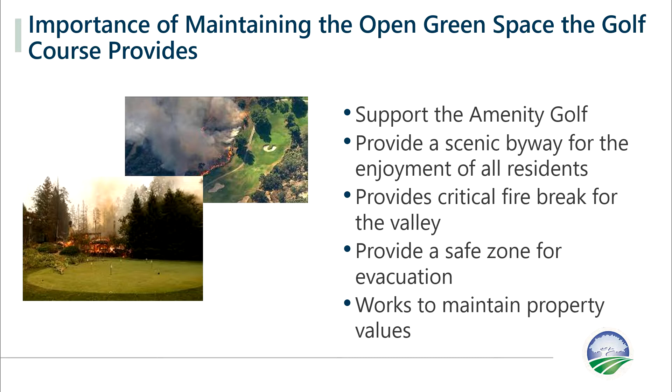So the golf course plays a critical role as a fire break. Plants that are low growing, open structure, and have less resin, such as turf, present a low fire risk. They provide large open areas with low fire fuel, creating defensible space as an effective fire break. It also places more distance between fire and nearby structures.

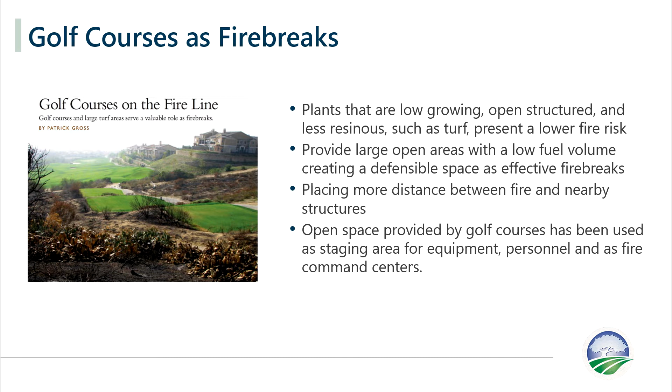Open space provided by the golf courses has been used as a staging area for equipment, personnel, and as fire command centers. A few examples of where golf courses near significant fires provided a break.

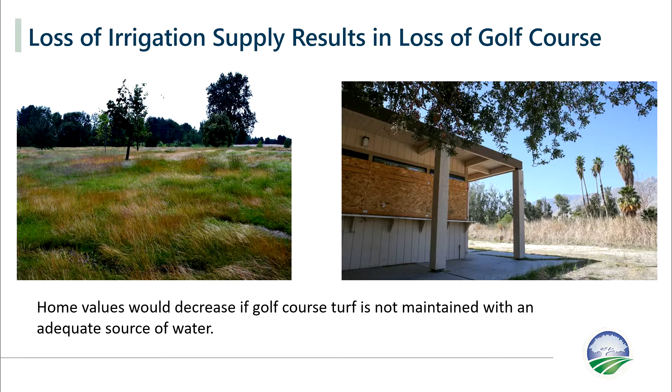Maintaining the golf course requires irrigation supply. You can't have a golf course in that green space without water. Throughout California, many golf courses have closed during the past drought due to lack of access to water, increased potable water prices, or restrictions on access to water. As golf courses go fallow, home prices around those golf courses are impacted. We don't want this vision here in Rossmoor.

Currently the golf courses at Rossmoor are irrigated through three main water sources. The first and main water source comes from Tice Creek. Golden Rain Foundation has riparian rights to Tice Creek, and throughout the year we utilize and divert water from Tice Creek into the pond and then use that for irrigation.

A large source of water flowing into Tice Creek comes from the water-cooled air conditioning units on many of the manors here. Those units create condensate that runs off towards the creek. During a hot summer month, we actually have greater flow in the creek than we do right now due to air conditioning units running.

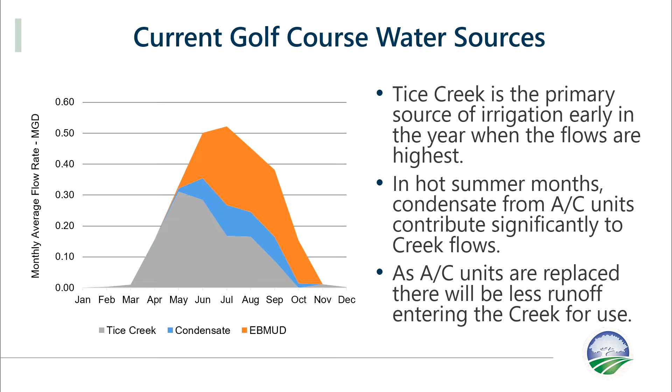Another source of water, when we don't have enough coming from the creek, is potable water from East Bay Mud. We begin purchasing water sometime in May and go throughout the peak months. The later we can go in the season before purchasing water, the better. But that is our other main source.

Tice Creek is a source where we have riparian rights, so we can divert water legally. However, during times of severe drought, the state can mandate curtailment to those water sources. If they determine there's not enough water to meet other demands from the creek, they have the ability to curtail those rights.

Condensate from the water-cooled air conditioning creates a great deal of the volume in Tice Creek. Those units are likely to be replaced over the next 5 to 10 years, so the condensate and runoff we currently recycle may go away. Tice Creek is a valuable source for us right now, but it is somewhat in jeopardy as we move into greater drought seasons.

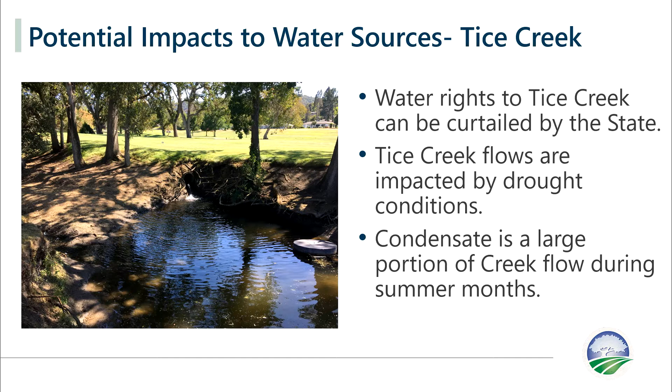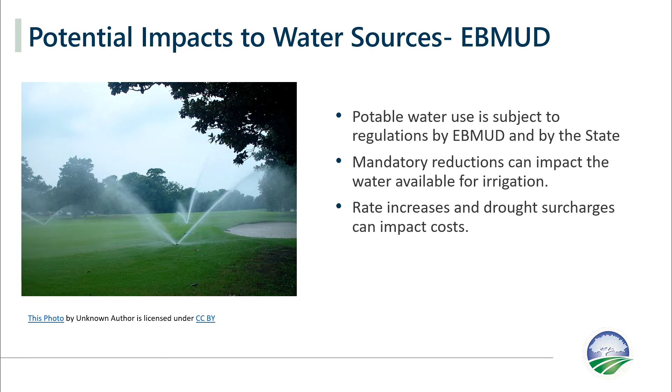Our other source, East Bay Mud water, is potable water and is subject to restrictions from East Bay Mud or mandatory restrictions from the state. We are currently in drought conditions—as of April 5th, our current classification is severe drought in Contra Costa.

Other areas in California are already in extreme drought conditions. Last year, at the beginning of September, Contra Costa was also in extreme drought, and that was just at the beginning of the rain season. The fact that we are already in severe drought conditions at the end of the current rain season is not a good projection for moving forward.

When you are under extreme drought conditions, water is inadequate for agriculture, wildlife, and urban needs. Fields are left fallow, orchards are removed. Fire season is very costly, and the number of fires and the season itself are extended. Many recreational activities, such as golf, are impacted.

Fish rescue and relocation begins. Policy changes begin. Agriculture unemployment is high, and food chain supplies are interrupted. There's poor air quality because of greater greenhouse gas emissions, and water shortages are widespread. Surface water is depleted, federal irrigation water supplies are extremely low, junior water rights are curtailed, and water prices are extremely high.

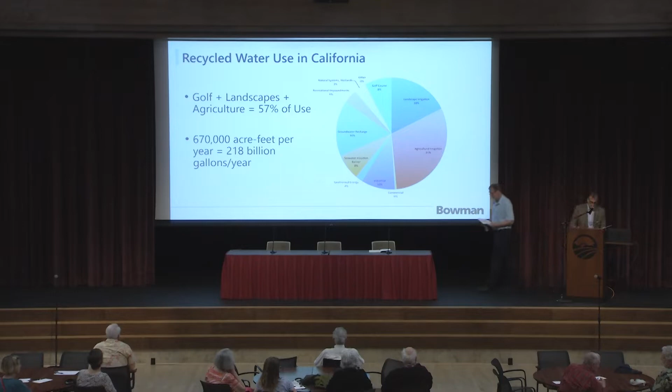Thank you, Jeff, and thanks to all of you for inviting us into your home this afternoon. We're proud to be here and to be part of the project that's being analyzed. I want to tee up, as Jeff did, the recycled water use in California, just so we can get a little bit of perspective about who's using it and how much they're using it.

On an annual basis, there's over 200 billion gallons per year of recycled water currently being used, produced and used throughout the state. Of that 200 billion or so, almost 60% is being used for a combination of golf course, landscape, and agriculture. So we know how to create recycled water acceptable to these end uses.

And we know, and are doing so throughout the state. We're meeting commercial, geothermal, seawater barrier, groundwater recharge, recreational impoundments, wetland development, landscape irrigation, agricultural, and golf course needs. Golf course is still on the low end, maybe about 8% of the total volume dedicated to golf course use.

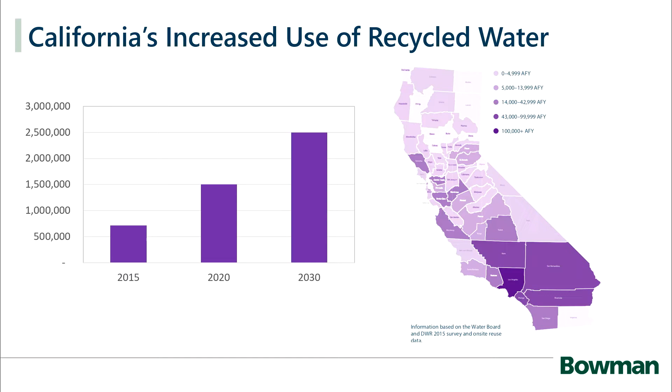As we use recycled water, we get another benefit. The potable water that we're currently using can be suspended and given back to the agencies that distribute potable water, making that supply more sustainable and more readily available, while instead we use recycled water merely on the landscape. So it helps both camps out. What we do with recycled water helps us maintain our potable supply.

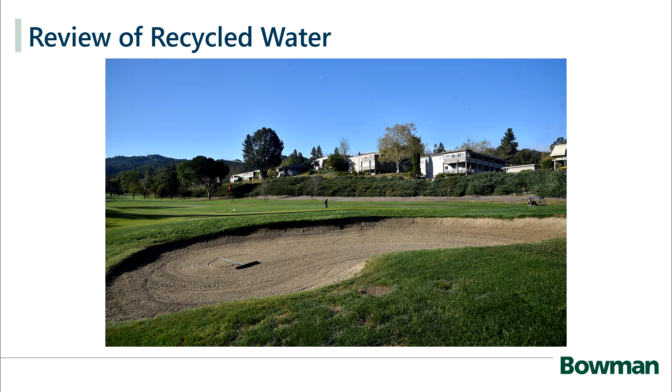I want to just mention briefly a review of recycled water. It's heavily regulated. It's regulated at the state level, at the regional level, and at the federal level as well.

California's Code of Regulations, CCR, regulates the development and use of recycled water through what's known as Title 22. Title 22 mandates that recycled water be used in a safe and effective way for non-potable reuse applications. I should amend this slide because there are committees at the state and regional level focused on indirect and direct potable reuse. That means going beyond the unrestricted use for irrigation purposes, but creating recycled water that can eventually go into the potable water system. It requires a much higher level of treatment than we're talking about here for the proposed project, but it is being done and it is being expanded.

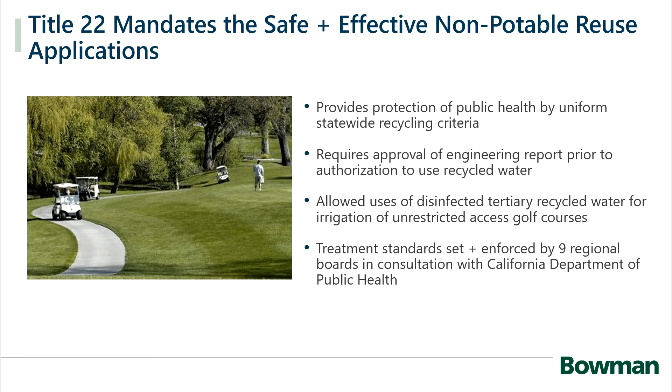Public health is protected by the mandates and requirements embedded in Title 22. An engineering report is required to be prepared, reviewed, approved, and accepted before production can begin. Treatment standards have been set, and they're regulated by 9 regional boards. Here we're within the service area of the San Francisco Bay Regional Water Quality Control Board.

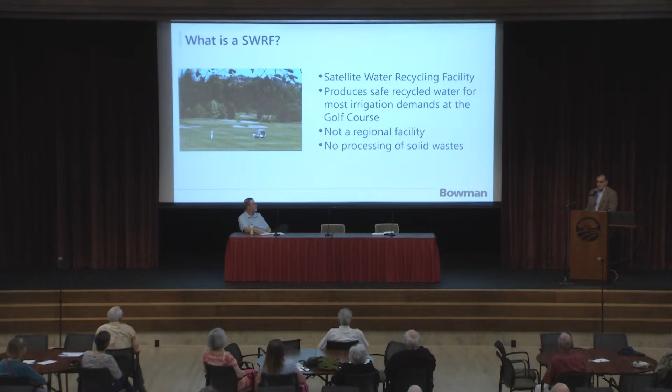Now, we've heard this term quite a bit, SWRF. What is a SWRF? Quite simply, it's an acronym for Satellite Water Recycling Facility. It's used to produce safely recycled water for most of the irrigation demands that the golf course has. It's not a regional facility. We're not looking to take wastewater from outside of the community and bring it in, and we're not looking at producing recycled water and taking it anywhere except within this community.

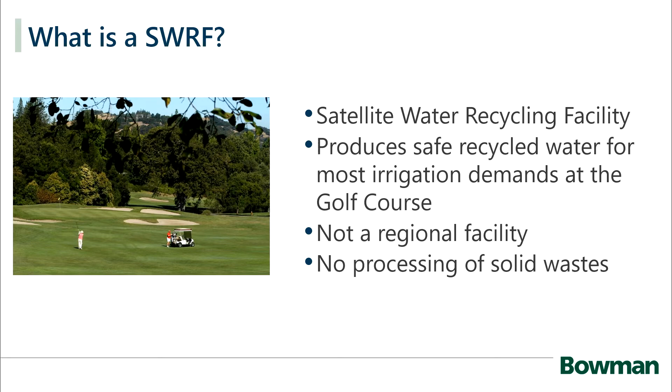Additionally, there is a solid waste component that's produced as the effect of doing recycled water. That solid waste goes back into the collection system as it currently does, to Martinez at the Central Contra Costa Sanitary District's treatment plant. So a SWRF is small. A SWRF produces recycled water in an on-site manner.

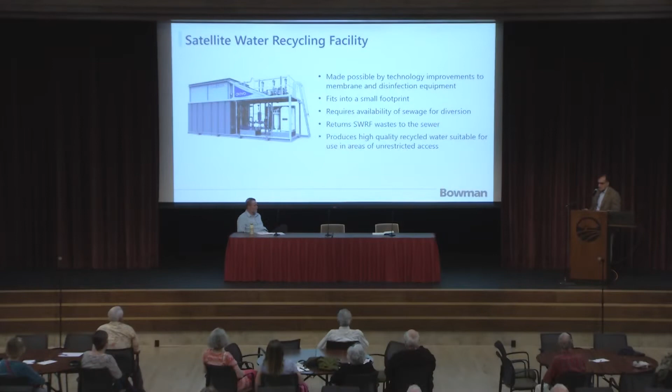Now, this is an example by Ovivo, just one of the many companies that manufactures these facilities commercially and makes them available for these types of projects for purchase. The satellite recycling facility looks at the membranes enclosed in the aeration chamber here as being the heartbeat of the facility. We got to this point where we're able to make such broad and large use of recycled water partly out of new technology.

The technology that has gone into the discovery, use, and optimization of these components, mostly the actual membrane itself, a semi-permeable membrane, has really been the crowning achievement in manufacturing these systems. The manufacturers have been able to shrink the size of the facility down, what's in the black box, because of these increases in technology. So the systems have become optimized, fitting in a smaller footprint, and they're available with the diversion we take in to be able to create recycled water at a quality that's acceptable for a purpose and an end use that's desirable.

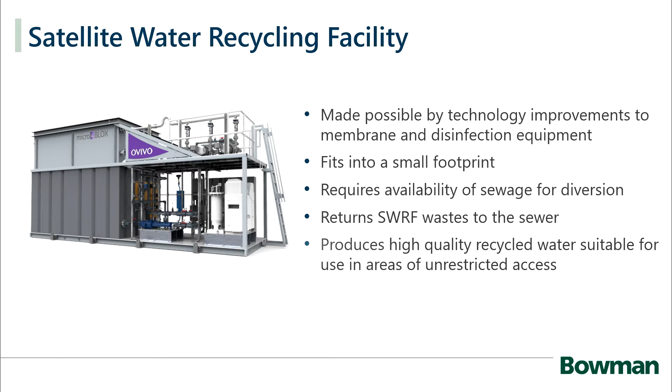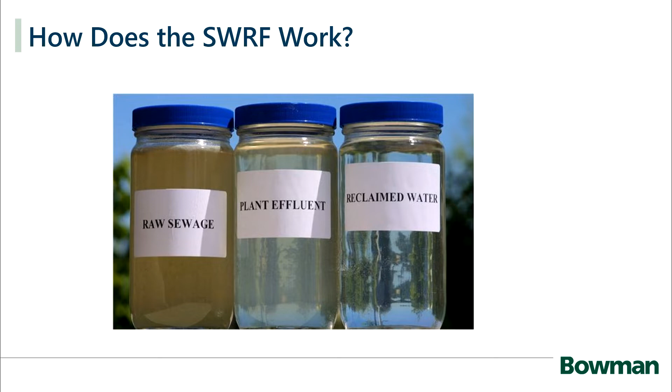Basically, the way these systems work is that we rely upon a series of microbiology inherent in our waste material. We optimize pH, temperature, and oxygen to give these commingled bugs the best environment to live in. Those bugs are managed to consume the phosphorus and nitrogen in the biomass included within this system of treatment. The bugs are then filtered, removed, disinfected, and are no longer a threat to us.

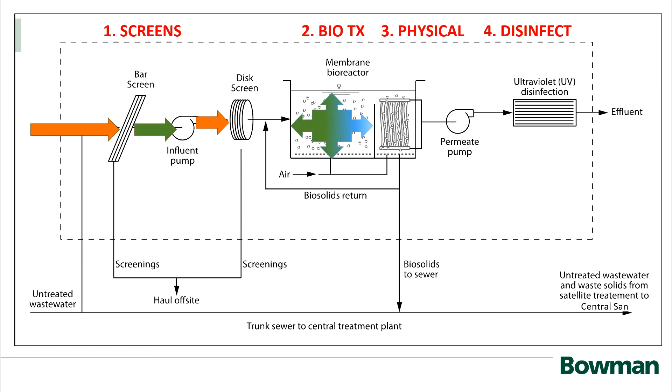This slide shows the treatment process, which begins on the far left, where influent from the diversion system comes in and goes through a bar screen to remove materials that would otherwise negatively impact equipment downstream. After the initial bar screening, we go to a narrower, smaller pore screening, shown here as a disc screen. Then we go into the aeration chamber, which typically has membranes submerged within the chamber itself.

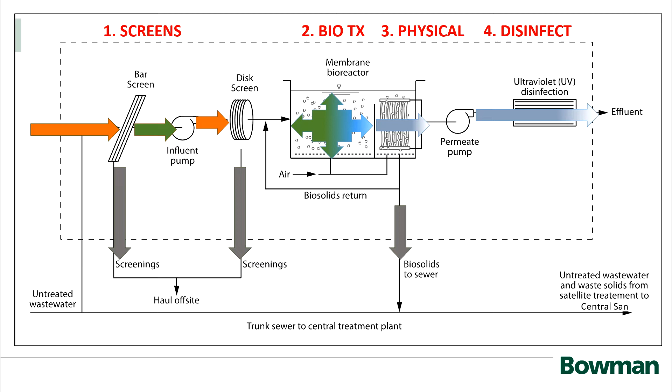Rossmoor has devised its own solution for sustainability from a water resources perspective. The project provides alternative water supply for irrigation. It's not subject to the curtailment provisions that East Bay MUD has, because we're talking about the use of our own water supply. Fire suppression results from monitoring and irrigation of our landscapes, and the site of the treatment plant, the SWRF, is proximal—close to the points of demand. We want to make those runs as short as possible, because it takes pipeline to connect the system up.

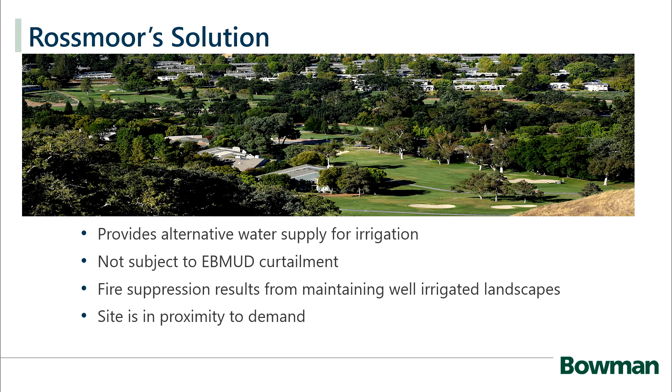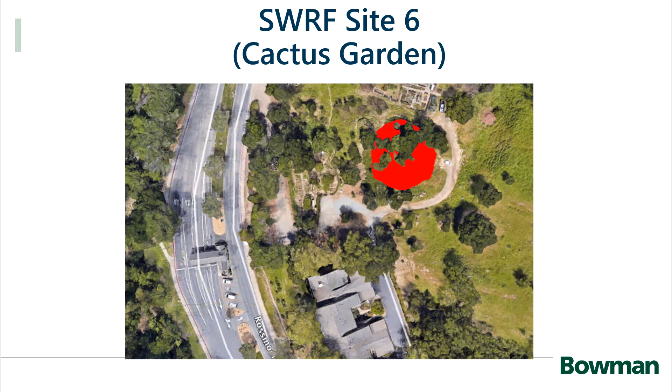So, studies have already been completed along this line of thought. Water quality sampling has been done, along with analysis to ensure we're dealing with water that can produce a product of quality suitable for irrigation of the golf course. Additional flow monitoring has been done, coordinated with Central San. Field environmental studies have been done for cultural resources, mapping of the sites has been completed, and geotechnical investigations are almost finished.

So what needs to be done before we proceed to any kind of construction? It's a bit of a long road and will take a while, but it intentionally provides several breakpoints at which the community could evaluate and reconsider the project. Updating the cost estimate is the first thing—this should be an ongoing activity because of its importance to the overall acceptability of the project. CEQA, the California Environmental Quality Act, mandates a certain amount of investigation of impacts to different resources.

The studies that will be completed include refinement of the conceptual design, which formulates the project description—we think that'll take about two to three months. Finalizing and circulating that document will take about six months. That's a deliberate process ensuring there's been adequate review by the lead agency and other agencies with responsibility over portions of the project, but most importantly, by this community.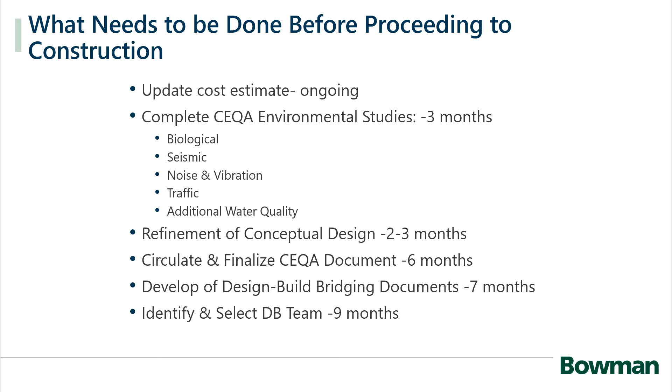There's a set of what are known as bridging documents that need to be developed. The intention is to use the design-build methodology—hiring under one contract both the designer and the construction contractor—in a way that reduces risk and reduces finger-pointing between those two entities. That's about a seven-month process. Then finally, the design-build team is identified and selected through a competitive process, which takes about nine months.

Now, the thing I didn't mention in these slides, but something we should keep in mind, is water conservation. Whatever we can do to conserve water—our use of water within the community—is vitally important. It helps us because we can lower the volume, and therefore the cost, of the facility we're talking about. And Jeff is going to speak to us now, starting off with a bit more on water conservation efforts.

As you can imagine, this is a project that involves a great deal of coordination and approval process with outside agencies, including the City of Walnut Creek, Central Sanitary District, and East Bay Municipal Water District. We are working with those agencies to develop a memorandum of understanding to make sure that we all work towards the same end goal of conserving water and producing a new resource for us.

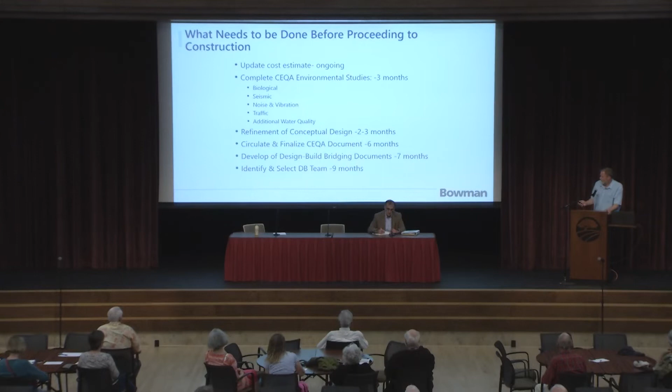So the development of a SWRF is certainly, as Jim just mentioned, a long-term goal, as there are many steps involved, and we've already been doing a lot, and there continues to be a lot to do. In the meantime, we certainly are looking for as many ways to conserve water as possible on the golf course.

This map, and there's also another one of these in the back, shows some of the area that's in yellow that has been taken out of irrigated green space and converted to either wood chips or other non-irrigated sources. I believe it's about 20 acres thus far. There is ability and plans over the next 5 years to try and identify an additional 5 to 10 acres that can be eliminated. That saves a significant amount of water.

We have also worked over the past many years to make sure and secure our water rights through the state of California and the riparian rights so we can safely divert water for the irrigation purposes. We capture as much water as we can already through all of the runoff that is experienced from both the water-cooled air conditionings, but any other source, and try and divert those so we can use those for irrigation.

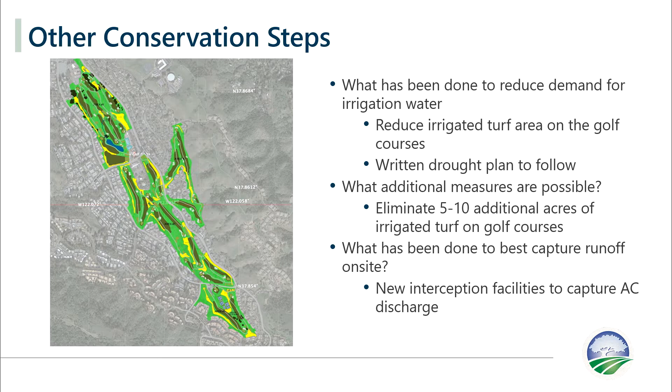We use a highly technical - not sure the right term for it, Blake - but our irrigation system is such that it does not waste water. We are below the evapotranspiration on our use of water, so we try and put down as little as possible. And we will continue to look for ways to conserve water. All of this helps us as we develop the SWRF to be able to build a SWRF that is as small as possible and relies on as little wastewater as possible.

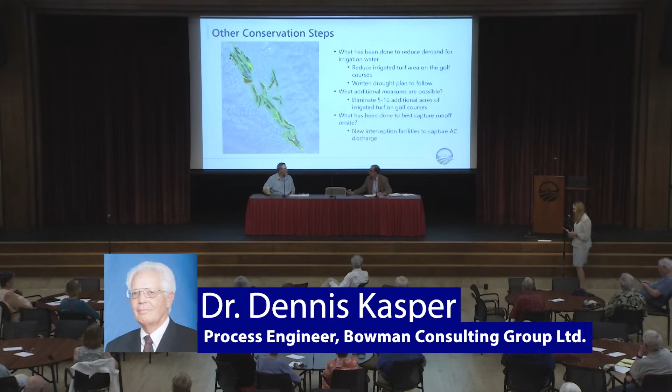Let me also add one thing. The photograph you showed of the Ovivo plant—if that were right next door, you would not see it. It's going to be either with vegetation or with visual blockers to make something that you simply won't see from off the site, basically.

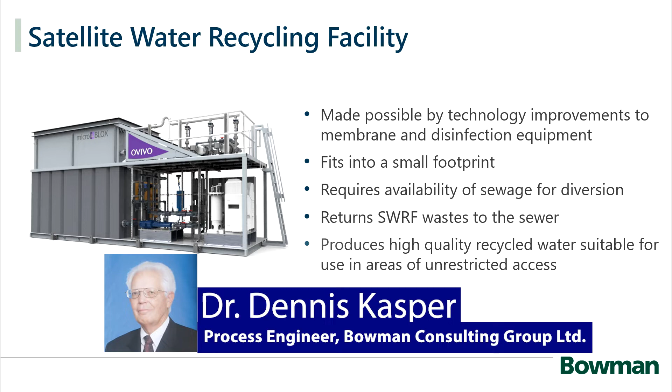Please provide dollar amounts and who pays. So right now we have funding approved to continue with the studies. The very preliminary estimate is in the $11 to $12 million range for the facility itself, and then there's an annual operating cost, which right now, again very preliminary, is in the $350,000 range.

If you compare that to our annual water budget for the golf course, it's very comparable. And we certainly expect that East Bay Mud rates will continue to escalate over time. So it is an expensive project.

It is an insurance policy. If you consider the alternative—if we don't have access to water and you lose the golf course, or you need to rebuild it—we have an estimate just for the cost to rebuild the golf course if it goes fallow for a year plus, in the $3 to $4 million range for efforts to reseed and replant and so forth. So it is expensive, but the alternatives are also potentially costly. We will continue, as Jim mentioned, to refine those cost estimates as we move forward.

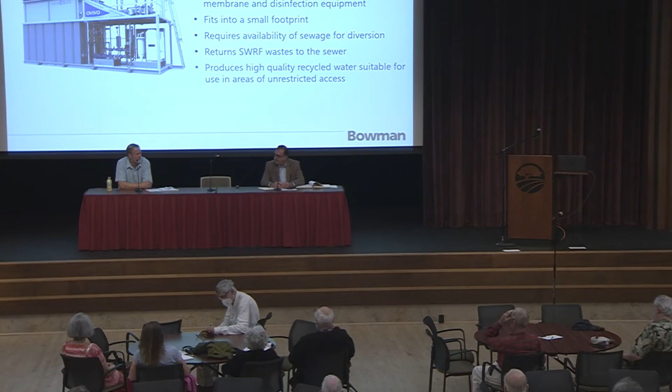With your golf course designer, you can begin to lay out a pathway that leverages this project, maintains maximum conservation, and maybe brings in a new design element or multiple elements. Where we start is the compatibility of the produced recycled water, its quality, with the susceptibility and acceptability of the plant. Depending on your choices for turf and ornamental landscaping, and how everybody's grown up being used to it playing in a certain way, those issues need to be talked through as well.

Maybe it's time that you want to engage a master designer and come up with a different style. Again, our piece of it would be to make sure the water quality is acceptable for those plants you want to bring in. This wouldn't prohibit—it would perhaps open more doors.

How much are we paying for the watering now? Our current budget is about $350,000, I believe, for the irrigation. Is that correct, Blake? 320. And certainly that's an estimate we go into the season with, but the actual amount purchased from East Bay Mud is a variable depending on how much water is available in the creek.

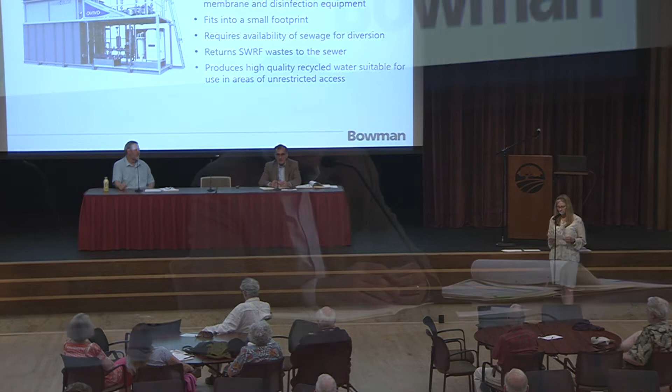Some people do characterize this, and I think rightly so, that a project of this nature is an insurance policy. We know that East Bay MUD's cost of water is only going in one direction—they're really not planning on lowering it.

They've got more to do when their revenues are down, like in periods of drought. They're trying to do as much as they can for sustainability. Projects like this, and conservation, are the only types of projects that actually create new water. East Bay MUD recognizes that, and if you look at their board materials and packets, they've debated and adopted that as a philosophy. They're willing to work with partners like us to get projects like this approved and through their system because of the benefits they provide to everyone.

Do we have wells servicing the golf course? If not, why not? There is one very small well. Many years ago, like 5 to 10 years ago, there was an effort to find a location that would be beneficial to adding a deep water well. Throughout those studies, no location was identified that would produce a quantity of significance. The small well that was added actually produces very, very limited amounts. It's not even operational, the limited amount it produces. There just isn't that kind of source available.

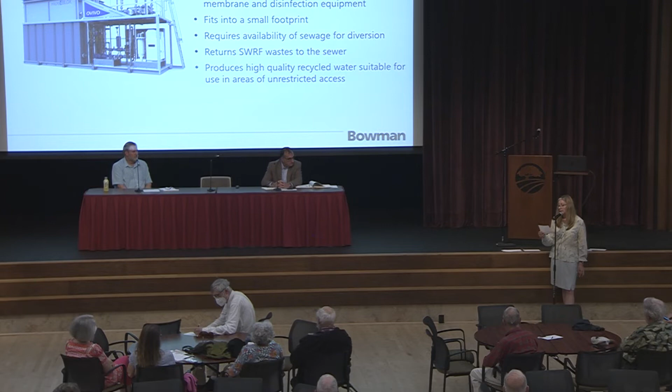Has GRF investigated using reclaimed water from East Bay MUD through a piping system similar to the golf courses in San Ramon? And what would the cost be compared to building the plant? The San Ramon DERWA project has done a phenomenal job creating a recycled water resource. They've used all of the recycled water that's available. There were a couple of other commitments they had made to golf courses to get recycled water, and there just wasn't enough. So they've done a great job, not only creating the recycled water, but getting it to the point of use or reuse.

What would that cost be compared to building a plant? The cost of bringing in new major pipelines from a distance to this location could be astronomical. The proposed project is looking at a small treatment plant, 250,000 gallons per day, with points of diversion and delivery fairly close to one another. We have not done an East Bay MUD solution for comparison, but it strikes me that the kind of infrastructure required, the distance of the pipelines, and the existing commitments and uses of recycled water—so how much is left—I think it's a good investigation if you wanted to find out with certainty. I don't have any more than that.

Were the residents as stakeholders considered? Well, that's one of the reasons we're here today. Certainly we are very preliminary in this whole process. We are continuing to look at the various sites, but throughout the process, and here today, we're here to listen to you, hear your concerns, and respond to those. Throughout the studies, we'll have opportunities for that very same thing. As this becomes decision points for the board, there are opportunities for input. So as we drill down further and further into this project, there will certainly be more and more opportunity for specific input from interest groups, whether it's neighborhoods, golfers, or other constituents.

How many employees or technicians would be needed to hire full-time, and what would be the salary costs per year? I think we just kind of did that one. Cost is getting a little preliminary for, we may contract this. There's a variety of ways we can go about providing staff for this, so that's a little premature right now.

What would be done with the treated water from the SWRF when the water is not needed for the golf course? Does it need to run 24/7 all year round? Two things would happen: the diversion pump station would turn down because we don't need to pump diverted raw wastewater if there's a lower demand for the irrigation water at that time. A strategy would be developed to automate that process as much as possible. We have the ability to turn down the diversion, and we let the wastewater flow by the point of diversion. So if we've overproduced recycled water and don't have a use for it immediately, it would just go back to the sewer.

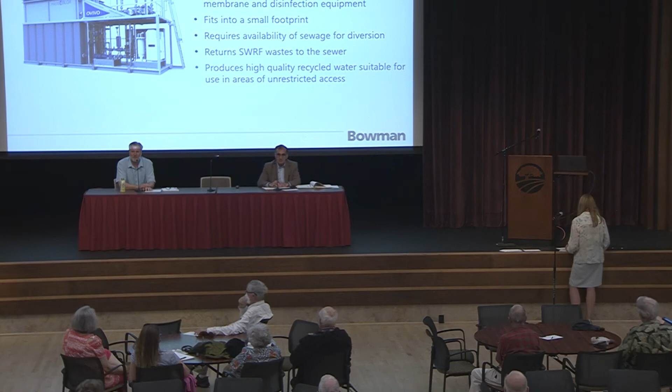Smoke from fires north of Rossmoor can be trapped in our valley for days. What will the smell of the water facility be like on a daily basis?

Raw wastewater facilities are often described in the industry as having a musky or earthy-like smell to them. If smells are noticeable at high concentrations and are off-putting, there's a reason why, and that has something to do with the way it's being operated or not being actively managed and operated.

This is a wastewater facility, well, we start off with the water supply, Mokelumne River water through East Bay MUD, excellent source, excellent supply. I think you go through the membrane bioreactor, a level of treatment that pretty much is unsurpassed.

I can't predict, it's a residential community, but the wastewater parameters, the chemical constituents of the wastewater should be even throughout the year, pretty standard. We don't expect wide swings in quantity of any of the components of the wastewater. So we expect a lot of similarity on a day-to-day basis, and then the ability of the team to provide corrective measures if something is just off, if it's not functioning correctly.

Are you going to have public hearings for the community surrounding Rossmoor, St. Anne's, the shopping center, et cetera? Do you want to speak to that from a CEQA perspective, that there would ultimately be a hearing in order to approve the document? There will be a public comment period during the CEQA process. Everybody would have an opportunity to comment, and there would be hearings at the City of Walnut Creek for the adoption of the CEQA document and the approval of the project.

The lead agency could also elect to have one or more meetings similar to this to get more input from the community. This project requires discretionary permits from the City of Walnut Creek, making the city the lead agency under the California Environmental Quality Act. So that's what we're referring to with the studies and the CEQA document.

How many membrane units? Dennis, do you have a configuration on cartridges or units on the membrane? When you say how many membrane units, the first division is it will have the ability to operate two trains, two process lines. So we'll have two halves of the system; half the membranes will be in one and half in the other. In terms of membranes, the specific number is going to probably be on the order of 20 to 40 membrane cartridges per train. That depends specifically upon the particular manufacturer and the design of the membrane elements.

When will some of the alternatives be eliminated? I think we're significantly early in that process evaluating both Site 5 and Site 6, so we likely won't eliminate one of those options for quite some time.

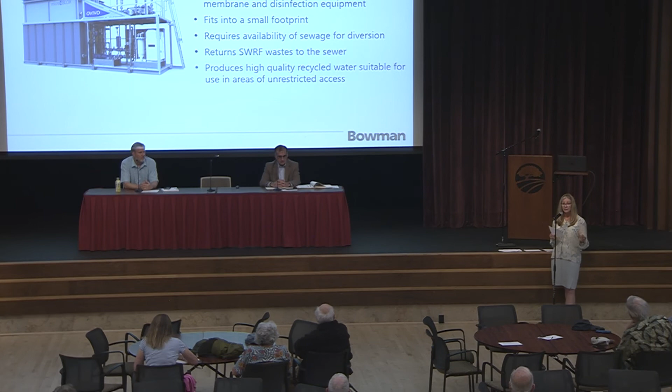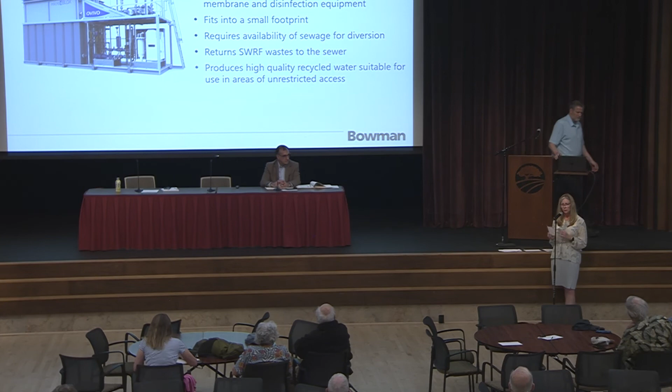The city of Walnut Creek will determine what level of CEQA will be done. There's some question about whether it would be a negative declaration with mitigation measures. If they determine there will be significant impacts that couldn't be avoided, they would require an environmental impact report, a very thorough document that would flesh out all the alternatives and areas of controversy, sections a negative or mitigated negative declaration wouldn't handle. Typically these types of projects have been mitigated negative declarations, and there have been no past impacts that couldn't be mitigated. But it's up to the city of Walnut Creek to make that decision.

We have all these. We've gone through all these. Let's see.

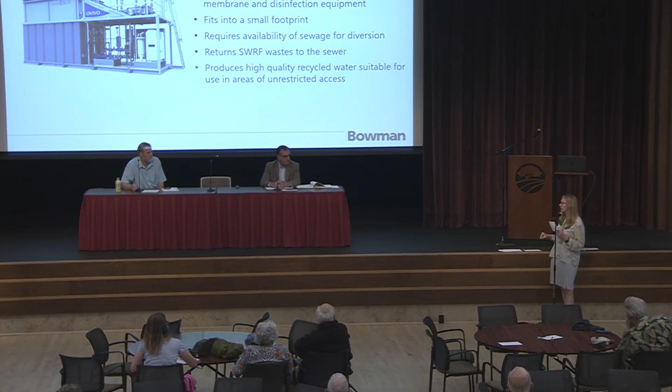The traffic related to Cactus Court—there would actually be an access road that would go directly to the site off of Rossmoor Parkway. We would not be accessing anything through Cactus Court.

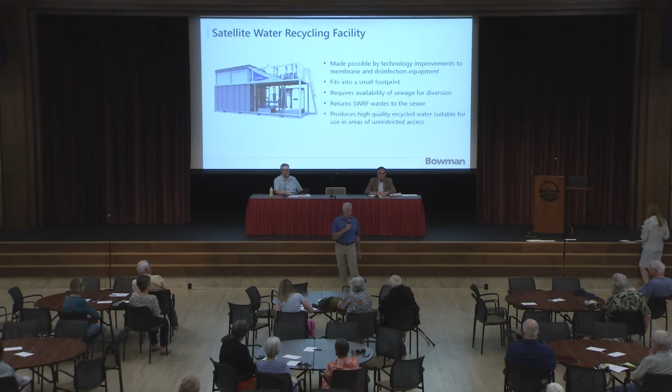Hi, I'm Dwight Walker, President of the GRF Board. I just want to thank you all for coming today. I want to reiterate what Jeff said: we're early on in this process, even though about $600,000 has been spent out of the trust fund so far, just to get us to a point where we can answer a lot of the questions posed today. But the big decisions are down the road—$11 million, operating costs, what it does to the coupon, all those sorts of things are coming down the road. We need your feedback, so please pose your questions. There are a number of months, maybe years, involved in getting this resolved. Appreciate you being here today, please send your questions, and we'll keep addressing them. Thank you.

Could Rossmoor buy two large tanker trucks and drive them back and forth to Martinez? We actually costed that out. The short answer is, in Martinez you can fill up, but only so much volume. And in order to fill up the pond, Blake, how often do we turn over that pond?

It's a lot of trips. Even if we hired somebody full-time, or two people full-time with trucks going continuously, we wouldn't be able to keep up. But we did look at that. I would think there'd be a significant environmental analysis under greenhouse, just the impact on the roads coming in with that. If you're proposing that much traffic weight, yeah, it needs to be analyzed.